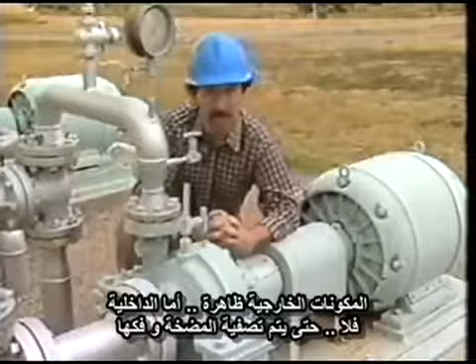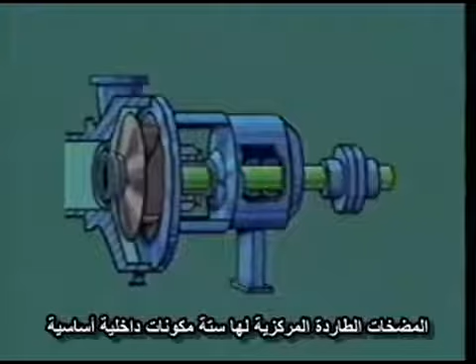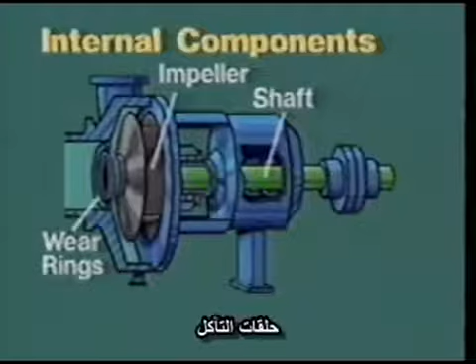External components are visible. Internal ones aren't until the pump is drained and disassembled. Centrifugal pumps have six main internal components: the pump shaft, the impeller, wear rings, the volute, packing or mechanical seals, and bearings.

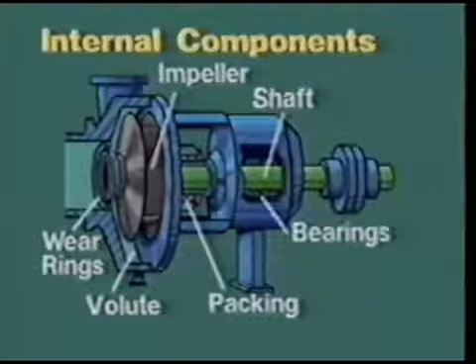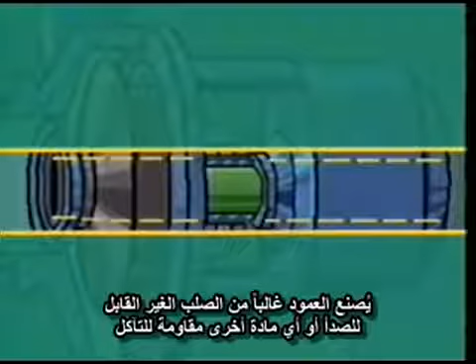The internal parts of a centrifugal pump are mounted on the pump shaft. It's a single piece of metal that's been machined to fit the pump perfectly. The shaft is usually made of stainless steel or some other corrosion-resistant material, for a very practical reason: replacing broken or worn-out shafts is expensive.

Some pumps have a shaft sleeve, a metal cylinder that fits over the shaft and protects it from damage. It's easier and cheaper to replace this sleeve than the shaft itself.

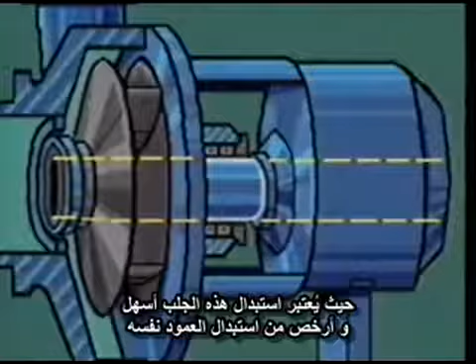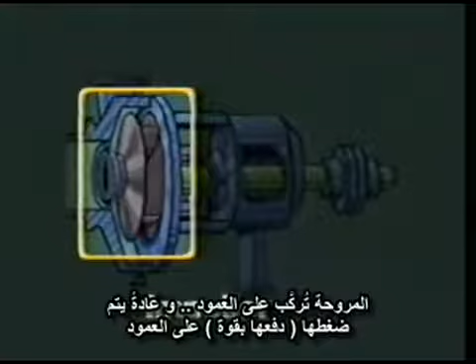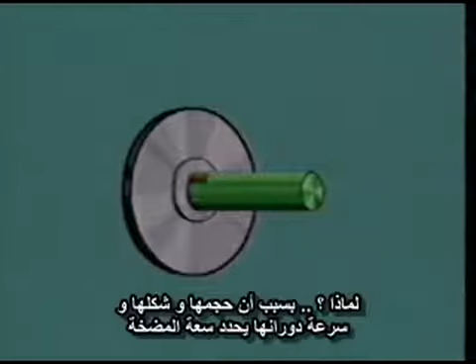This circular device is an impeller. The impeller fits snugly on the shaft and is usually pressed on. It can be held in place by several methods, but the most common is with a key and key way. The impeller is the most critical part of a centrifugal pump. Why? Because its size and shape and the speed at which it turns determine pump capacity.

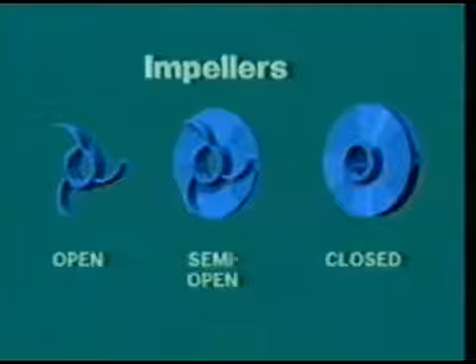There are three types of impellers: open, semi-open, and closed. Open impellers basically are vanes mounted on a shaft with just enough backing or shroud to keep the vanes rigid. Semi-open impellers are completely covered on one side of the vanes. Closed impellers have shrouds covering both sides of the vanes.

They also have a central hole or eye on one or both sides. That hole lets fluid enter the impeller.

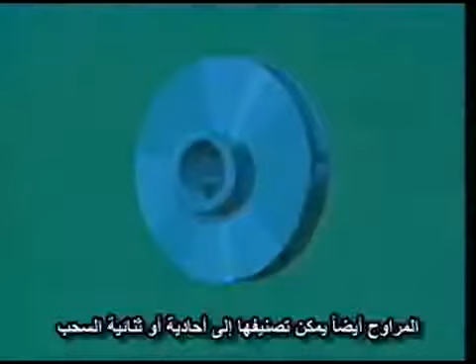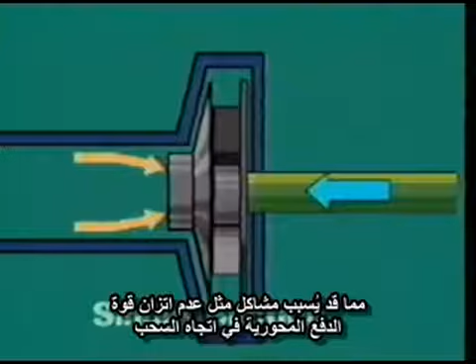Impellers are also classified as single or double suction. With single suction impellers, fluid can enter only one of the impeller's sides. That can cause problems such as unbalanced axial thrust in the direction of the suction. In high volume or high discharge pressure pumps, that problem can be serious.

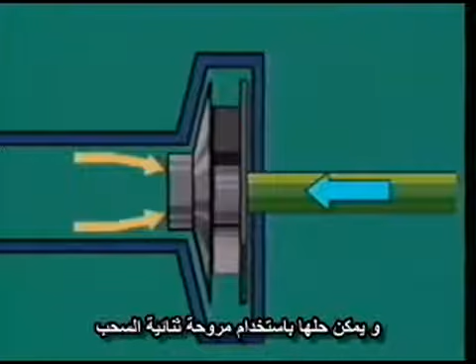It's resolved by using a double suction impeller. This type lets fluid enter both sides of the impeller. That makes the thrust generated on one side of the impeller counter the thrust from the other side.

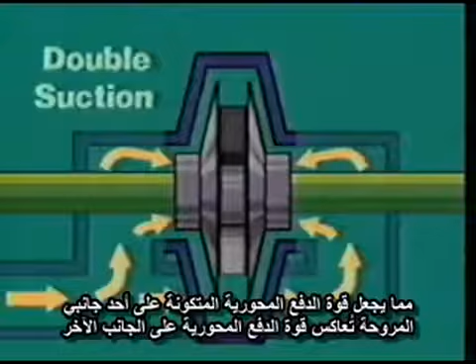Pumps also come in stages, single or multiple. A single-stage pump will work fine for many applications and will raise pressure sufficiently, but there are times where more discharge pressure is needed. It's possible to raise that pressure by increasing the rotation speed of the impeller or by increasing the impeller size, but that's not generally done because of design and material limitations.

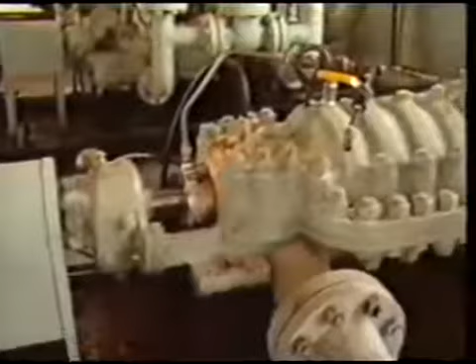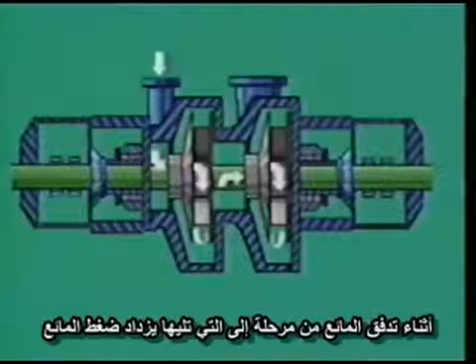That's where multi-stage pumps come in. They have two or more single-suction impellers mounted on a single shaft. The discharge port of the first impeller is directed to the suction port of the second, and so on through additional stages. When the fluid flows from one stage to the next, fluid pressure is increased.

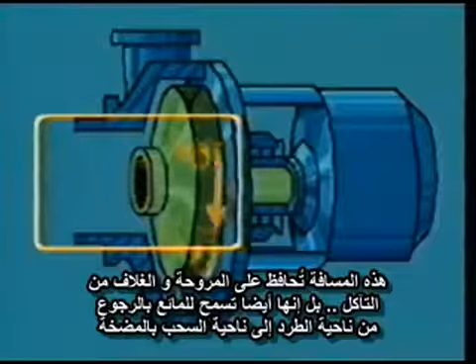We know the impeller has to rotate. In centrifugal pumps, there's a space between the impeller and the casing so that the impeller won't rub against the casing. The space keeps both the impeller and the casing from wearing out, but also allows the fluid to leak back from the discharge to the suction side of the pump.

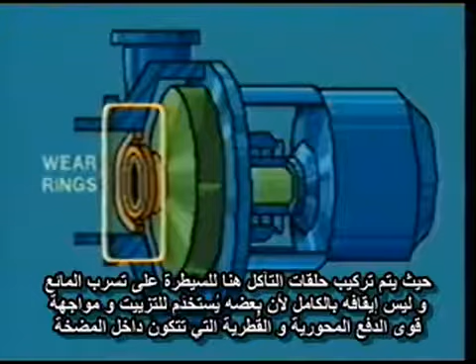Wear rings are installed in this space to control fluid leakage, but not to stop it altogether, since some leakage is important for lubrication and for counteracting the thrust and radial forces that build up inside the pump. When wear rings are attached to casing, they're called casing wear rings.

These are called impeller wear rings. They're fitted to the impeller. Some centrifugal pumps are fitted with both casing and impeller wear rings.

Remember the volute we talked about in Section 1? It's the chamber that's wider at the discharge nozzle than where the fluid leaves the impeller. That increased area lets the fluid slow down, and as it does, some of the fluid's kinetic energy is converted to pressure.

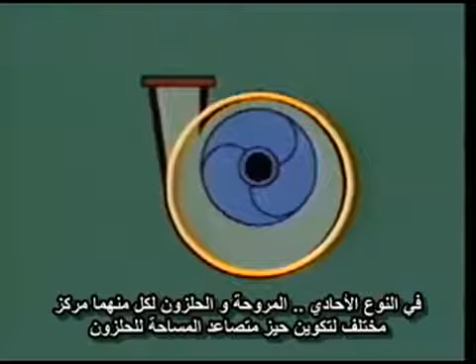Volute casings are either single or double. In the single type, the impeller and the volute are offset from each other to give room for the increasing size of the volute. But there can be a problem with this setup: internal fluid action in the volute tends to set up unbalanced radial forces.

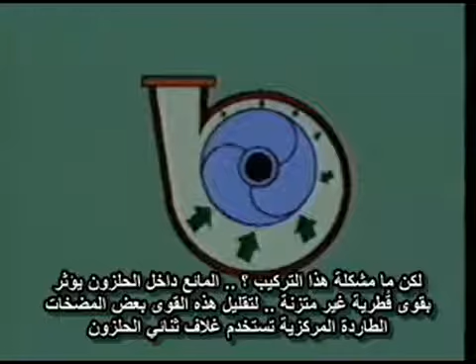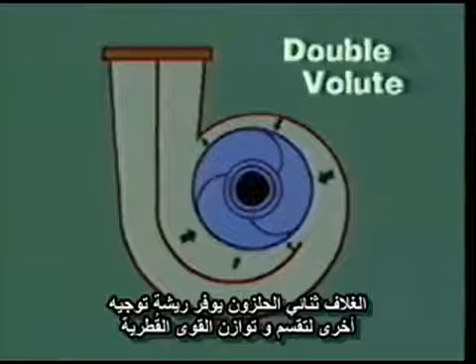To reduce those forces, some centrifugal pumps use a double volute casing. The double volute casing provides a second guiding vane to split and balance the internal radial forces. There are other advantages of double volute casings: they give the casing greater internal strength, and they also reduce some of the stress load on the casing walls.

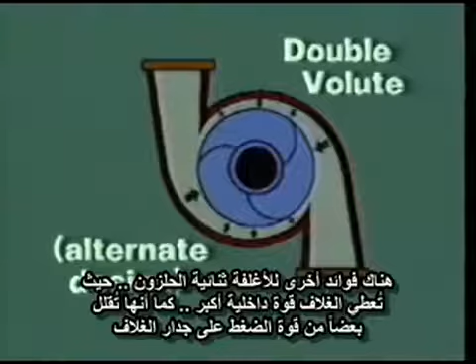There's an alternative to the volute called a diffuser. It too has a chamber, but its chamber doesn't increase in size the same way a volute's does. Instead, there's a series of stationary vanes arranged around the impeller that direct the fluid outward from the impeller.

The diffuser's vanes are further apart at their outermost point than at the edge of the impeller, so they create a series of widening chambers that function as a volute does in converting kinetic energy to pressure.

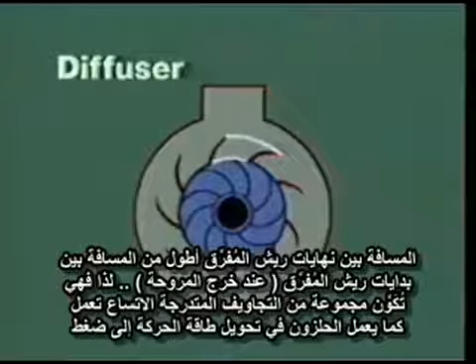We've already seen a lot in this section. We'll examine packing and mechanical seals along with bearings before we take our next break.

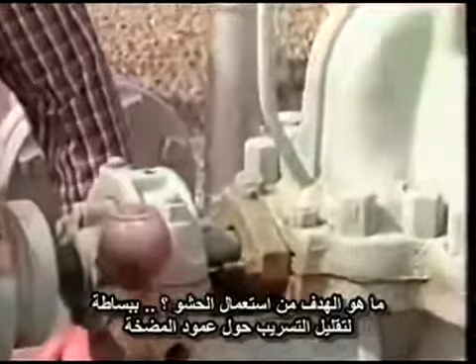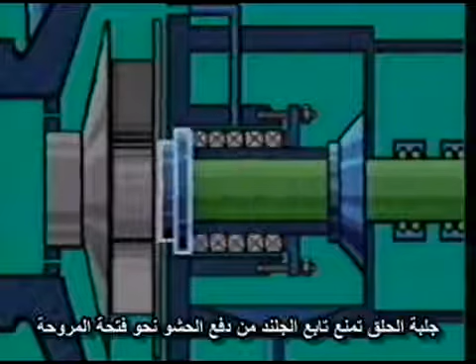What's the purpose of packing? Simply to minimize leakage along the pump shaft. It does that by sealing the clearance space between the shaft and the casing. A throat bushing keeps the gland follower from forcing the packing into the eye of the impeller.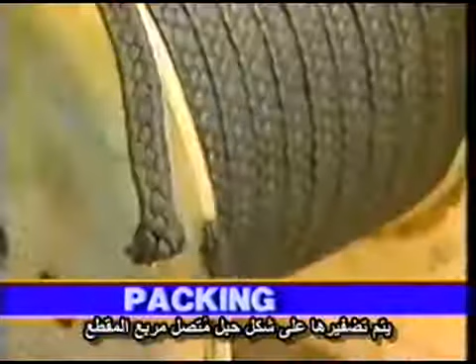Packing is soft and pliable, usually made of cotton, asbestos, or flax. It's woven or braided into a continuous, square-shaped strand. Generally, it's coated with graphite or Teflon for lubrication, and since it's softer than the shaft, there's no damage to the shaft when it rubs against the packing. Still, additional lubrication is needed to cut friction to a minimum.

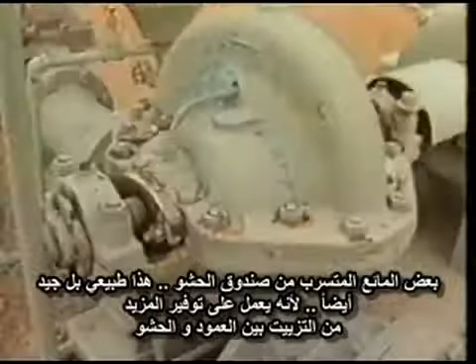Some fluid leaks out of the stuffing box. That's normal, and even good, because it provides more lubrication between the shaft and packing.

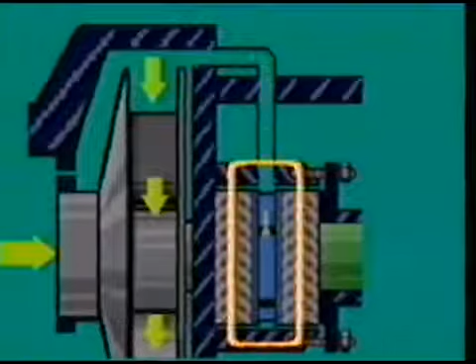Lantern rings are sometimes used to pressure lubricate the packing. These perforated metal rings are located between layers of packing in the stuffing box. They allow additional fluid from the gland sealing line to be injected into the stuffing box. That helps lubricate the packing.

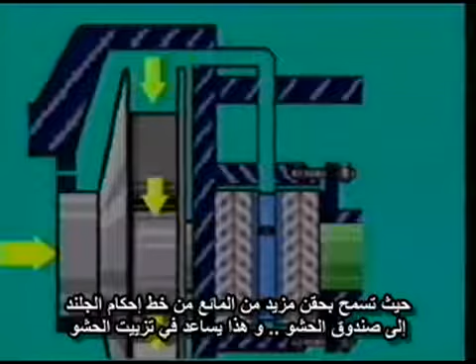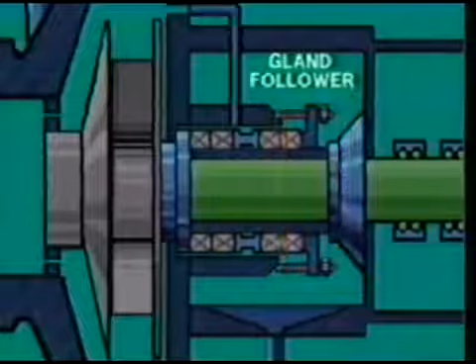Look closely and you'll see that this piece called a gland follower fits into the open end of the stuffing box. It holds the packing and lantern ring in place against the throat bushing. If you adjust the gland follower's pressure against the other parts of the packing gland, you can regulate the flow and leakage rate of the fluid lubricant.

Although many centrifugal pumps use braided packing in stuffing boxes, in the petroleum industry, mechanical seals are more and more the norm for three key reasons.

They don't require leakage, which means greater safety when pumping hydrocarbons. They last far longer than packing, and they need less maintenance. Those points are especially important if the pump's in a hard-to-reach or inaccessible location.

There's a wide range of mechanical seals available today, but they all have similar methods of operation and similar components. Rotating parts are attached to the shaft. Stationary parts are secured to the seal plate. The seal plate is bolted directly to the casing.

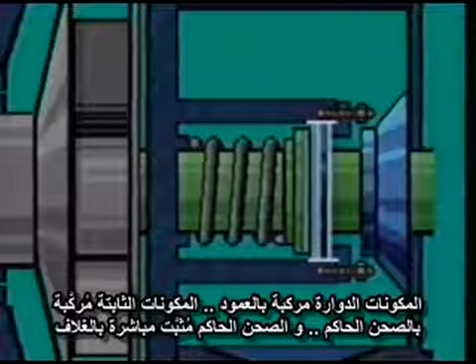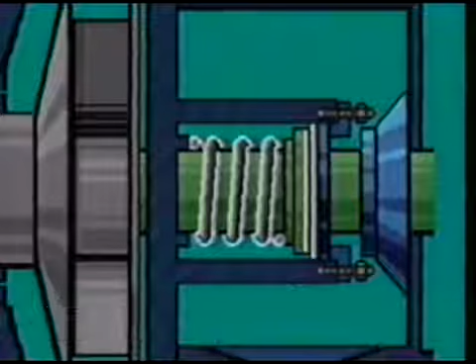The highly polished sealing faces of the rotating and stationary parts are held in contact by one or more springs. In this manner, a seal is made to prevent leakage. That's the typical structure for all mechanical seals. Let's go on to bearings.

Bearings basically support the shaft and reduce friction as it rotates in the casing. They also do two other things, as you'll recall from Section 1. They control the forward and backward movement, or thrust, of the shaft, and they control the side-to-side, or radial, movement of the shaft.

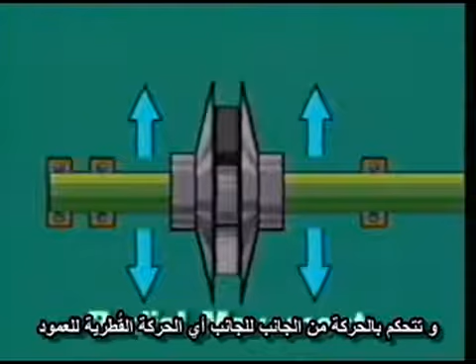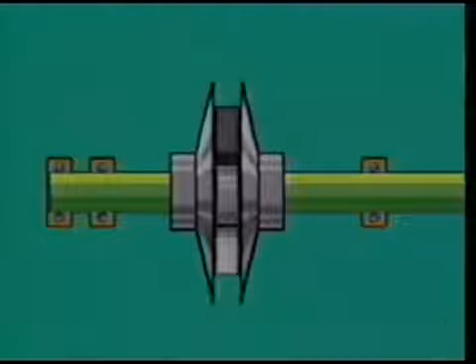Centrifugal pumps use two kinds of bearings, ball bearings and sleeve bearings. Inside this circular ring are smooth metal balls that are free to roll as the shaft rotates. These are ball bearings. They're usually lubricated with oil or grease.

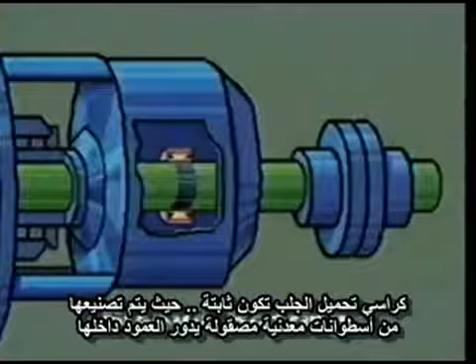The sleeve type is stationary. It's made of smooth metal cylinders in which the shaft rotates. Sleeve bearings are lubricated and cooled by a thin film of oil between the bearing surface and the shaft. That oil is brought to the sleeve by a ring oiler, or under pressure from a lube oil pump. The ring oiler transfers oil from an oil reservoir to the pump shaft and the sleeve bearings.

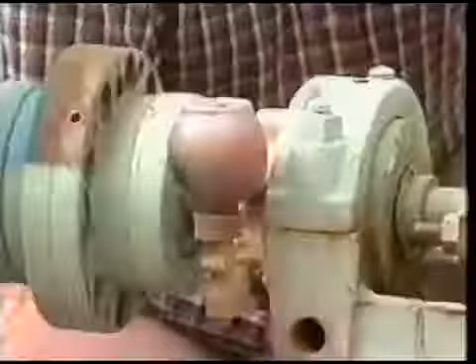It's critical to lubricate bearings properly. Without adequate lubrication, bearings will overheat, rust, or corrode, and sooner or later cause the shaft to seize or stop.

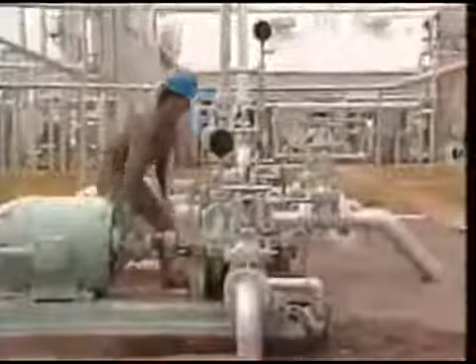Centrifugal pumps can get hot, especially large pumps or those moving high-temperature fluids. Excess heat is most damaging to bearings and packing glands. Sometimes this heat is carried away by the ambient air or by the fluid being pumped. When it's not, water jackets are frequently used to provide additional cooling.

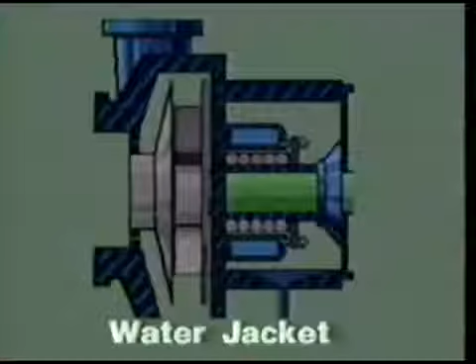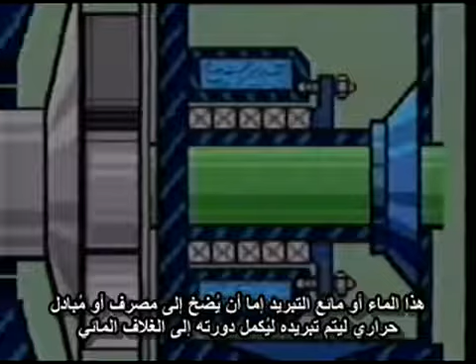These jackets are channels located in the casing, near bearing housings and packing glands. Water or another coolant is pumped through the channels to absorb the heat. That water or coolant is then either pumped to a sewer or to a heat exchanger to be cooled before it's recycled back through the water jackets.

We've covered a lot of information in this section. Let's stop now and review the manual. Review this section of the videotape, if you need to, before proceeding on to the last section on classifying centrifugal pumps.